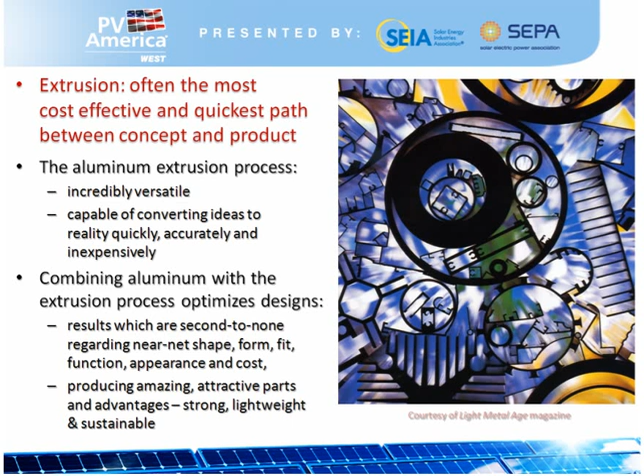So a lot of times, with steel, you're faced with trying to figure out how to fabricate and assemble something and join it together. With aluminum, you can build these features right into it. And it's very easy to combine the capabilities of the aluminum material with the extrusion process to get something that really represents an ideal way to build a product. Not always, but a lot of times. Aluminum is strong, it's got a whole bunch of great advantages, three of which I've highlighted in red. It's got a tremendous strength to weight ratio, and it's corrosion resistant. And I think those are three things needed for long-term life in solar applications. Those are three nice attributes to have.

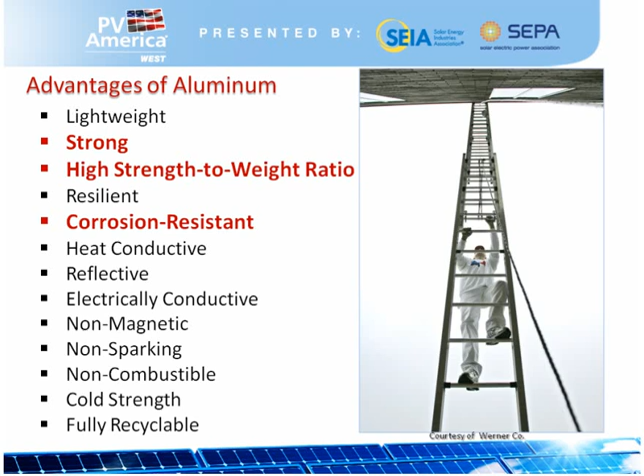Aluminum extrusions, when you take the aluminum and now you fabricate it by the extrusion process, they're very easy to fabricate. They're easy to design. You can join them by different means. They're suitable for easy assembly.

You can produce them to close tolerances with great quality. This isn't something new. These extrusions have been out since the 1940s, commercially at least.

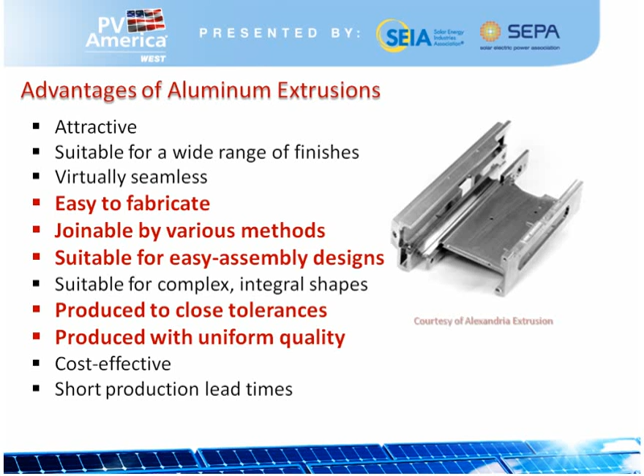It's not a sexy new product, but we have an infinite variety of shapes we can make, making it a wonderful product for designers to optimize whatever the next thing they need to build is. This is an example of a robotic arm.

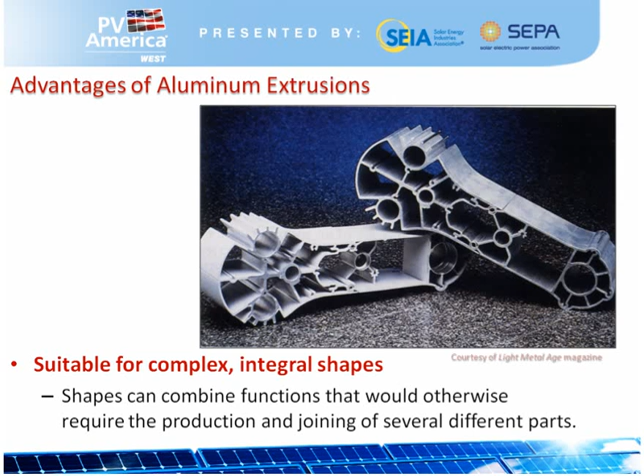If you try to picture building this out of something else - this piece would typically be extruded out to maybe 100 feet in length, then cut to the needed length. We can build features in, heat sinks, connection means, strengthening ribs, all built right into the part. Some of these aluminum parts do double duty - they may not just be structural, but also serve some other function you need.

The other thing extrusions are is extremely cost effective - because of the flexibility, but also because the tooling is very inexpensive. You'd be hard-pressed to spend $5,000 for an aluminum extrusion tool.

Most of the solid dies you can get for around $400 or $500. And the lead times aren't measured in months, they're measured in weeks. So if somebody comes up with a new shape, you can prototype and test things out pretty quickly.

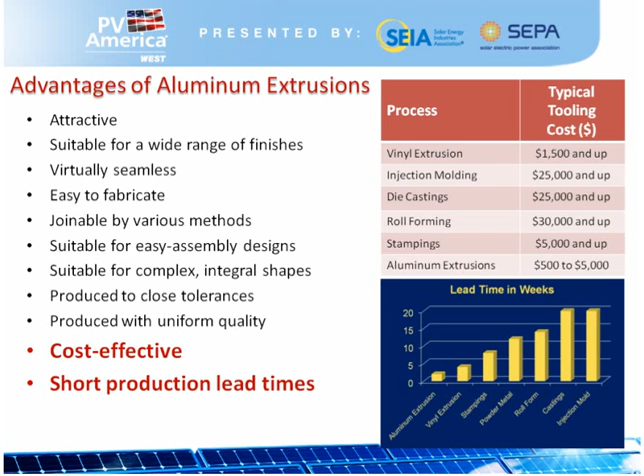I'm not going to talk you through all the little doodads you can build into this shape, but this is just a sample Werner used to give out to people so they could dream about what they could build into an extrusion. You'll have that accessible to you afterwards.

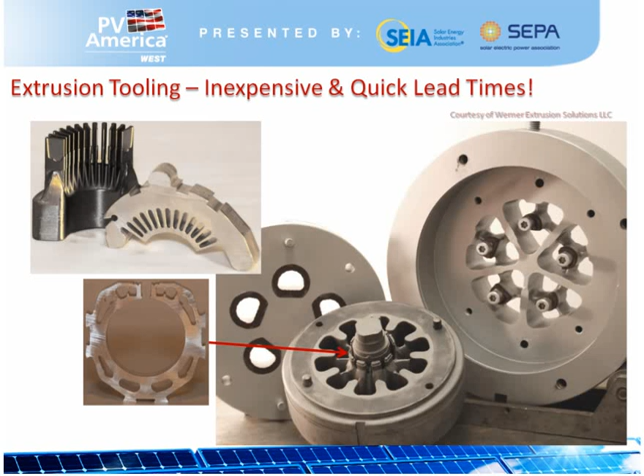Tooling is very simple - these things are actually sitting in my office. They're somewhere between $500 and $5,000 depending on what you're buying for the tool. And extrusions aren't only structural.

Of course, they're very good at heat sinks. They're very good at dissipating heat. So for inverters and other components in CPV, it's certainly used a lot.

These are just a couple pictures of extrusions I'm going to show you. They can be simple tubes, complicated shapes, have screw bosses built into them - all kinds of features.

So extrusions, in general, are strong and efficient, and they're really creating long-lasting structures that are critical to our future.

So, I've got aluminum ladders. I made aluminum ladders. My plant made 3.5 million ladders a year, and I've still got the ladders leaned up in the back of my garage that my father gave me when he was done using them. They last forever. Fiberglass is a great product.

Werner makes fiberglass ladders, but they're affected by UV over time. Aluminum - you see these aluminum ladders on top of people's trucks, workers' trucks - they're there forever. And that's what you want out of solar components too. You don't want a balance of system that you have to maintain.

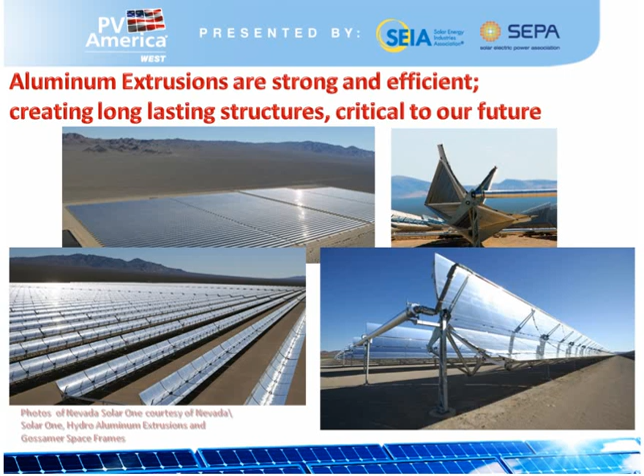So the aluminum extruders industry hired IBIS Consulting, an ex-MIT group that goes out and looks at strategic material choices. We had them do two independent studies - and by independent, I mean they really were independent. We weren't guiding them. We told them we want to understand how we compare to steel.

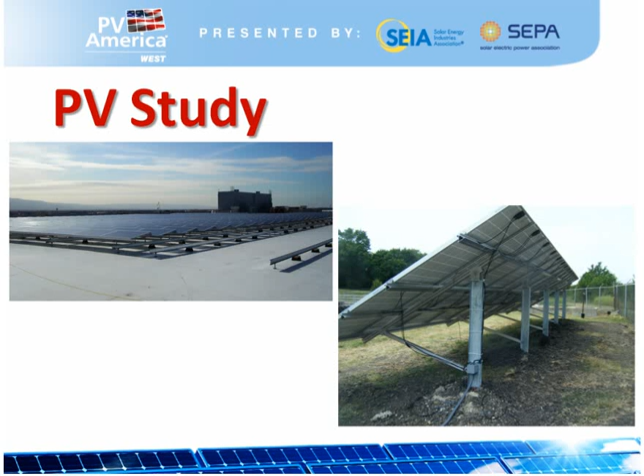So they looked at PV and they looked at CSP. I'm going to first talk about the PV study. This is the IBIS contact information, which is also in there. Their goal was to look at installations ranging from residential rooftop to commercial flat roofs to ground mount utility scale, anywhere from 1 to 5 to 50 megawatt systems.

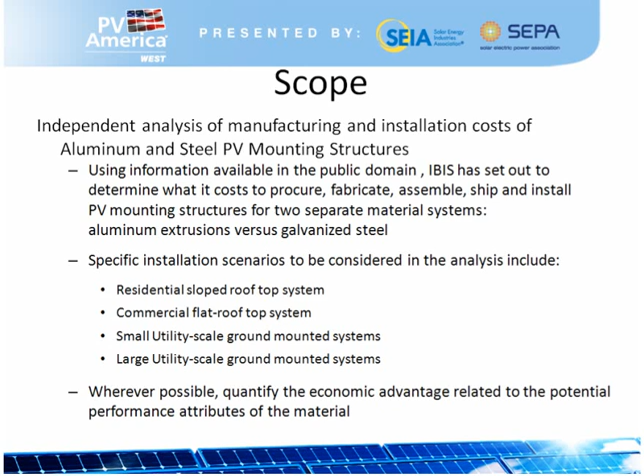They wanted to understand what the cost drivers were - not just the purchase material, that's easy, but what the total cost is of putting in one of these systems. So they contacted different manufacturers and distributors of these parts.

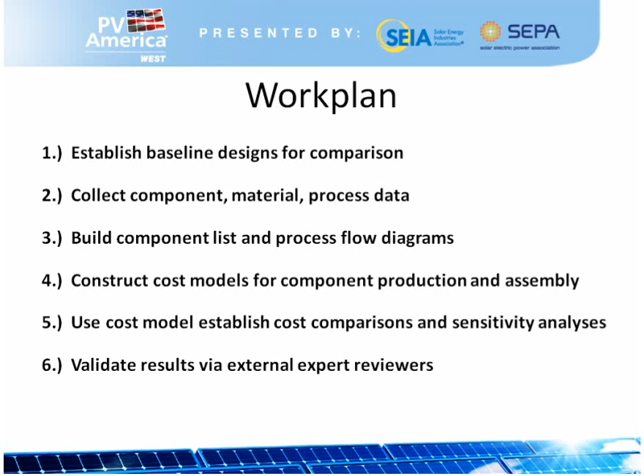They contacted the people who do the installation and actually looked through videos that were available from IEs and engineers out of MIT. They also did some time studies to verify it. So they took information from a bunch of different sources and brought it all together so they could compare all the information and come up with an accurate cost model.

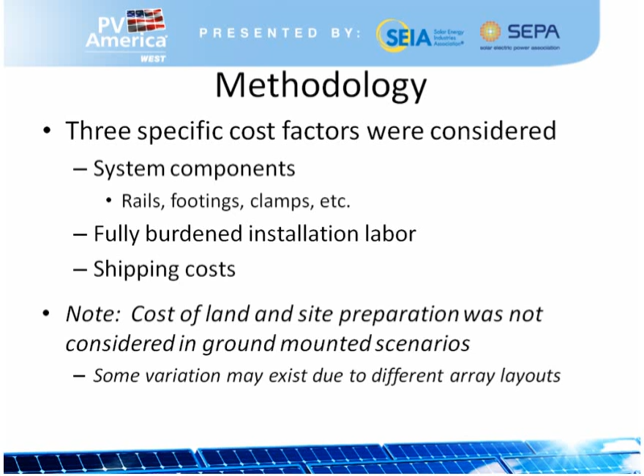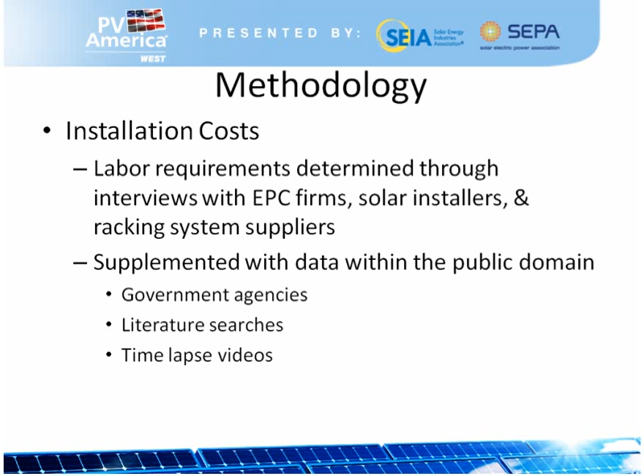They didn't look at land because it's different depending on where you're installing things. But they looked at, for aluminum and steel, all the different costs: procurement, extruding it, fabricating it, shipping it, subassembling it, assembling it, and they even looked at the recycling cost, the recycling value that would be applicable someday.

I am not going to go through the details of these studies. They're here on the slides, I'm going to flip through them so you'll see what they are. But I'm going to take you right to the conclusion because I think the other gentleman would like to have a chance to speak as well.

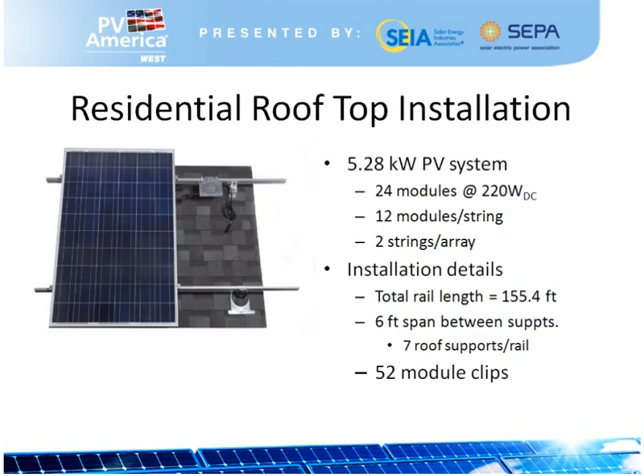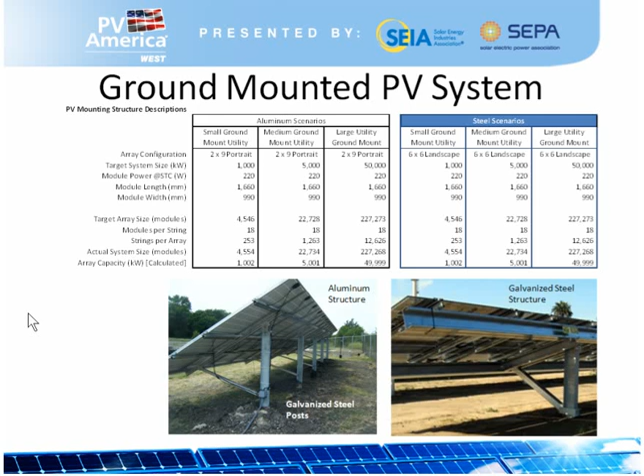So this is the basics. We're building up from what are they looking at to what does it mean. They looked through, they talked to different equipment manufacturers, different suppliers of these systems, and they got listings of what the parts were that go into them.

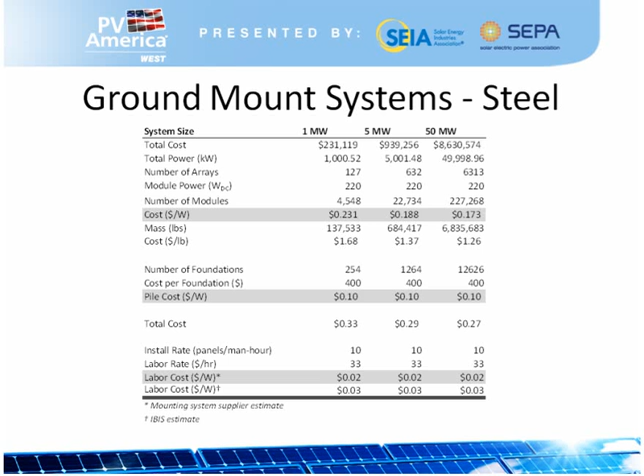They have their own cost models, but they also use the pricing they heard from them. And they eventually came up with what is the cost of all these components, as well as the installation, shipping, and everything else.

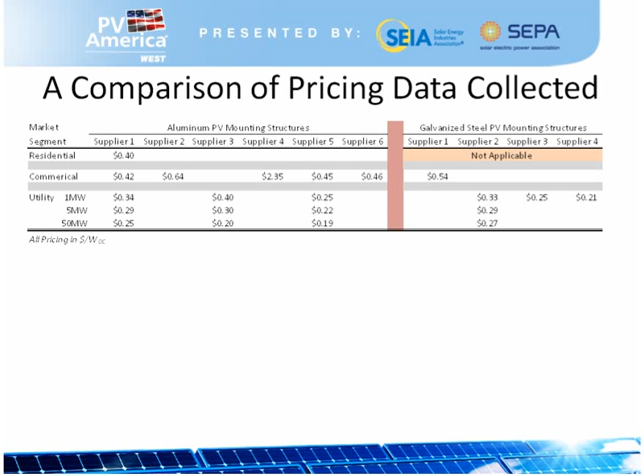So the bottom line, if you look at a study like this, is showing for aluminum PV mounting structures and for galvanized steel PV mounting structures in residential, commercial, and 1, 5, and 50 megawatt fields, what the price is. I'm just going to focus on the utility scale fields here. You can look at this on your own. But you can see the aluminum ranges from 19 to 25 cents, and the steel is 21 to 25. It hits a 33 up there.

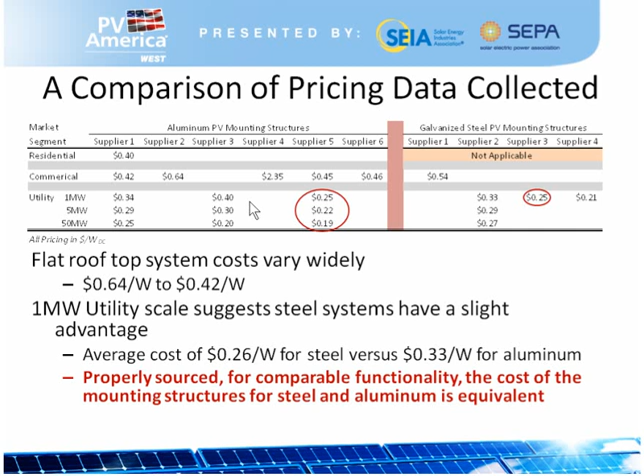Somebody in aluminum was charging 40. You guys probably aren't going to buy from them. But properly sourced, aluminum on the material cost basis is very, very competitive with steel.

But it's more than just the material cost, because you have to look at the installation cost as well. And the installation of the aluminum versus the steel is less. If you were charged with putting these things up on a roof or putting them in a field and installing them, steel's heavy. Sometimes you need a crane, sometimes at least you need two guys. A lot of times with the aluminum things, particularly the individual parts, it's easy to grab in one hand with your tool in the other.

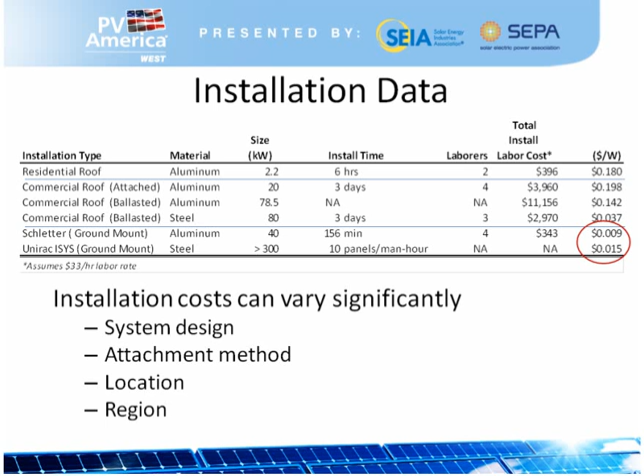And it sounds simple, but we made 3.5 million pounds of aluminum ladders and fiberglass ladders, and you build them up out of a lot of small components. And that's what these solar fields are built out of.

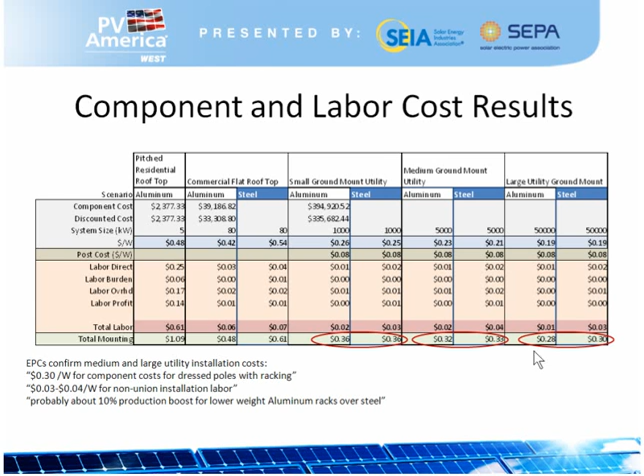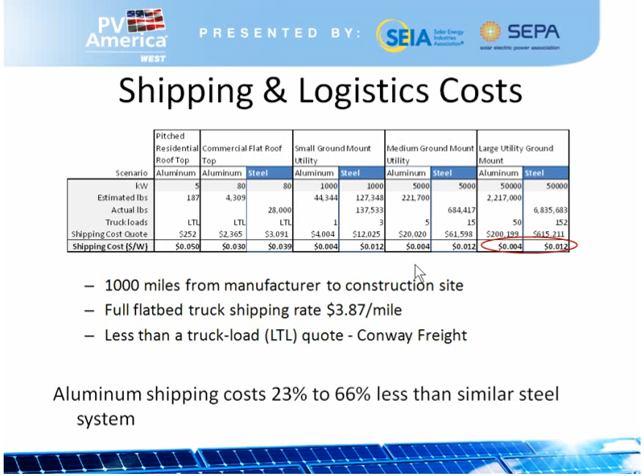So when we look at those costs, we see that for the utility scale, again, the costs are fairly comparable, 36 cents per watt. It's a similar cost, aluminum to steel, but when you start to look at shipping, now you start to see a difference. Shipping costs of aluminum are about 0.4 cents per watt, and shipping costs for steel are about 1.2 cents. Steel is heavier than aluminum. And because of this, that adds a little bit more leverage to the argument for going with aluminum.

When we look at the entire structure, wow, aluminum is really—let's look at a medium ground mount. Aluminum is 38 pounds per kilowatt compared to steel, 99 pounds. But aluminum is more expensive on a dollar per pound basis. So actually, when you look at the costs, you might look at it and say, well, that's true, but the aluminum is $5.86 a pound, and steel is $2.12.

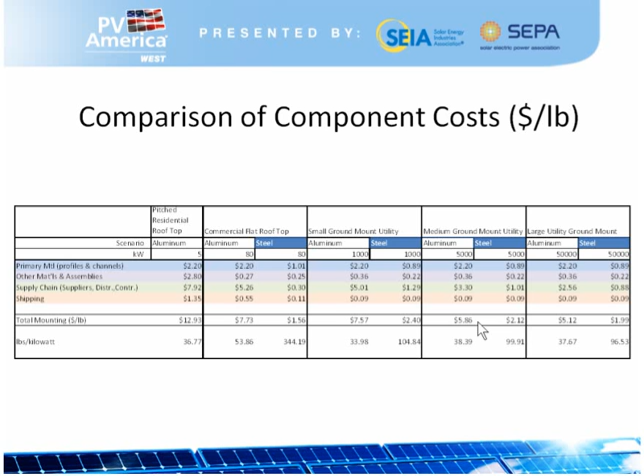So clearly, you're going to be better off going with steel - that's one of the messages, unfortunately, that people take out of this. If you were to look only at the cost of the material on a dollar per pound basis, one might say aluminum is always much more expensive than steel on a dollar per pound. But you're not buying pounds.

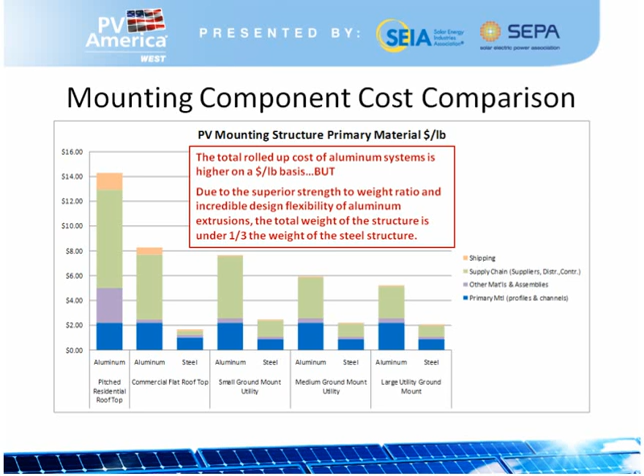If I wanted to sell steel ladders, I could. Nobody would want to carry them or want to maintain them, but you could sell a steel ladder. You buy aluminum ladders because they are very efficient, both in terms of cost and weight. When you roll in the weight of aluminum versus steel, you find that actually aluminum is less expensive per watt than steel is - it's 32 cents to 34, versus 29 cents to 31. It's always a bit less expensive.

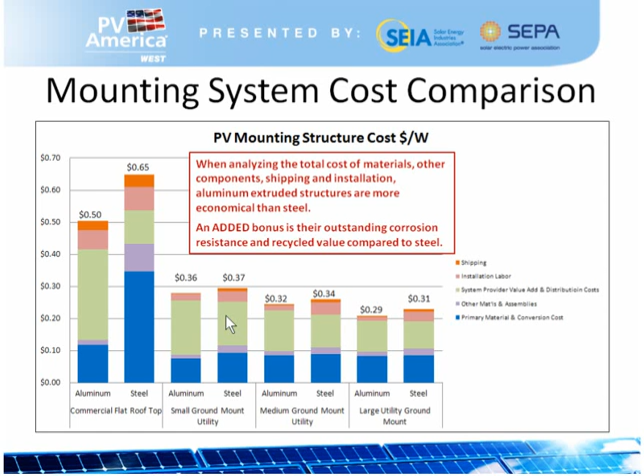So this gets back into what I was saying, the total installed cost of these systems. You've got to look at the whole picture. And we're certain that aluminum presents a compelling argument to do that.

A lot of times, these things are going to be mounted up on roofs or out in the field somewhere. Someday somebody's going to take these down and they're going to recycle them. We're in a green industry - we don't want landfills full of these things, and aluminum has a substantial value. If you were to look at a 50 megawatt system, for example, there's about 2 million pounds, $2 million in current value of recycled material out there. Steel is about 600,000. So besides being a little bit less expensive, the total cost of installation, you've also someday got the recycling value - most people are not looking at that.

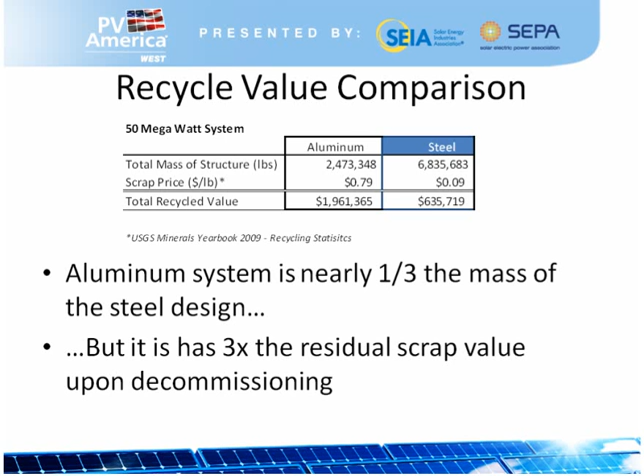But in the total cost of ownership, you've got to buy the stuff fabricated, install it, maintain it. Remember that one, because aluminum doesn't corrode - you don't have any of those issues in the field. And eventually you get to recycle it.

The CSP study is much, much shorter - the study was just as long, but we looked at 5 different steel designs and 1 aluminum design. There's only one that's actually out there. The aluminum structure, dollar per unit area, which is the amount of mirrors that are supported, is just under $40 per square meter, versus the steel designs ranging from almost $60 down to $50.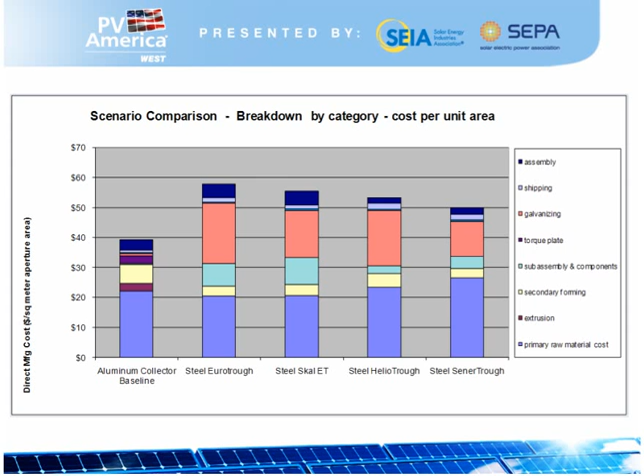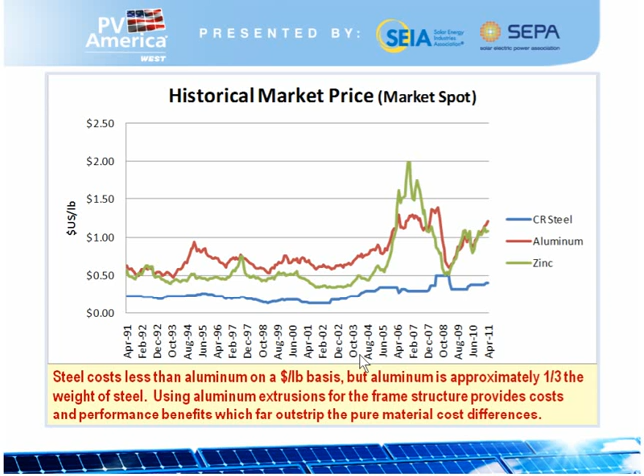When you take all of these material components and put it back into the IBIS model, basically it shows there was no time over the last 20 years where steel was less expensive than aluminum. Plus, you get the tremendous features of aluminum that you can build in - the performance, the ability to not have to maintain these structures because they don't corrode, and the recycling value when you're done.

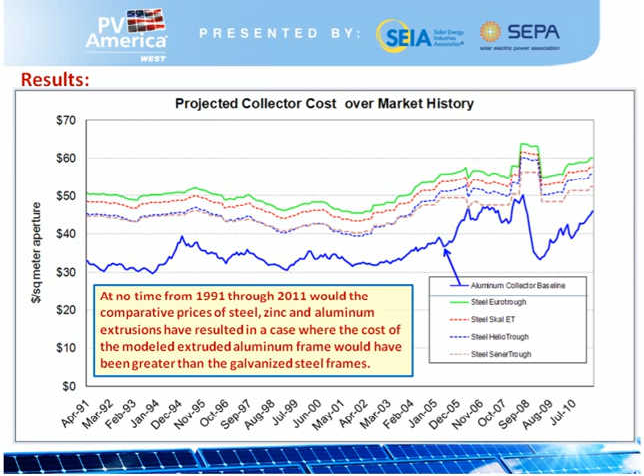So we are certain that aluminum provides a compelling argument, and if you walk out there on the floor, you're going to see the exhibitors, and there's a lot of aluminum material out there. We just want there to be even more, because we know that there's more opportunities to put more aluminum product out and to make a better long-term solution for the solar industry.

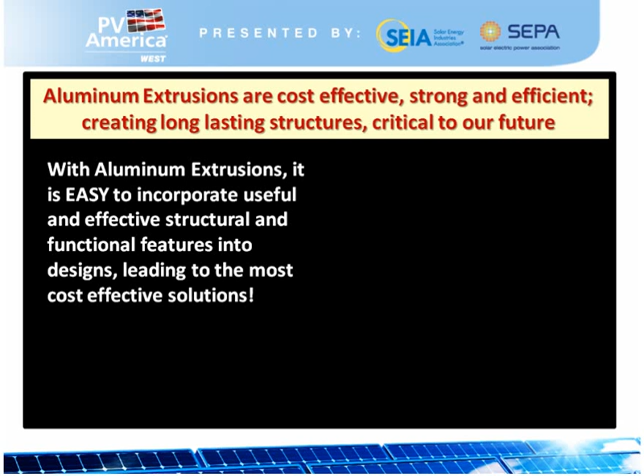But aluminum's here for the long run. Those ladders have been out in the back of my house forever. They were out in the back of my father's house forever, and my kids will probably inherit them as well. And they're still safe to climb. The same thing will exist for your solar structures. Okay, I'm going to turn it over.